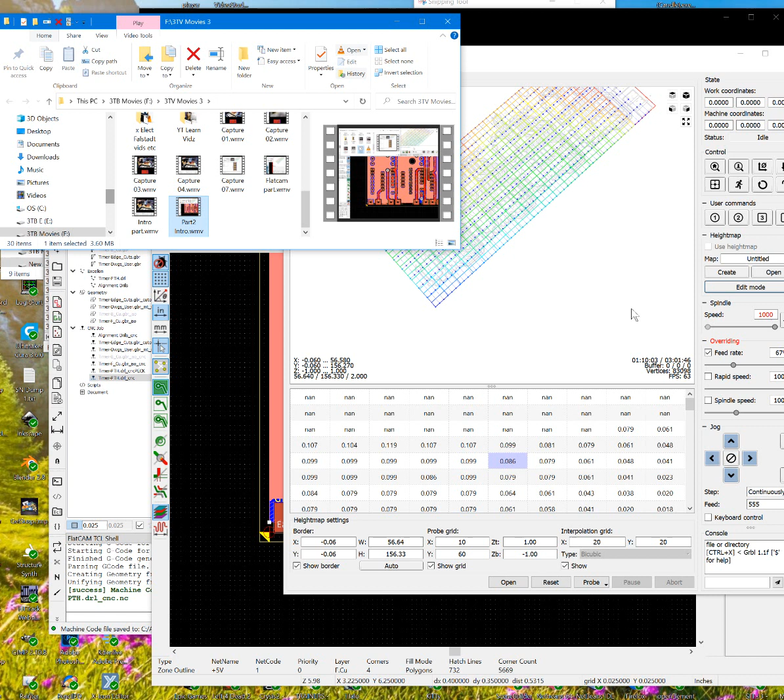Alright, I wanted to make a brief informational video about some of the software I'm using, just real quick.

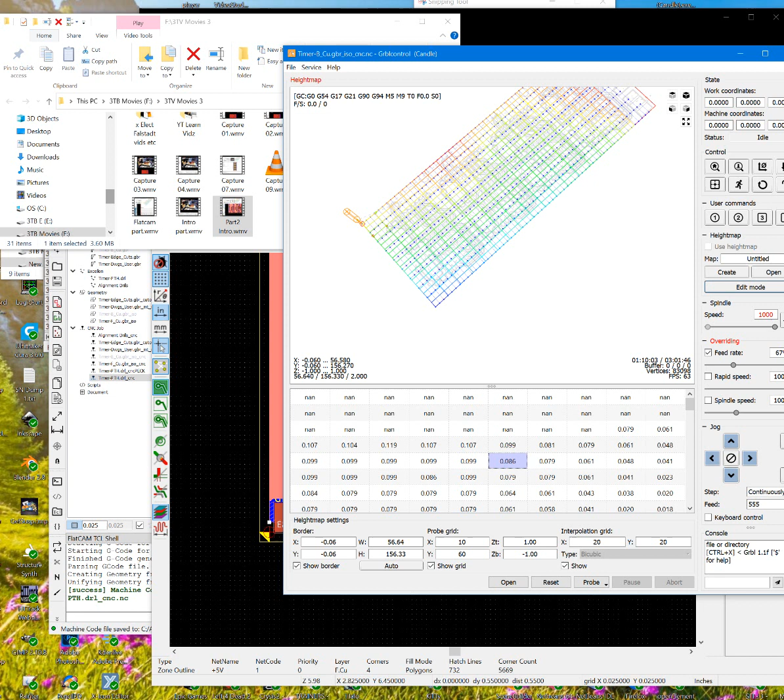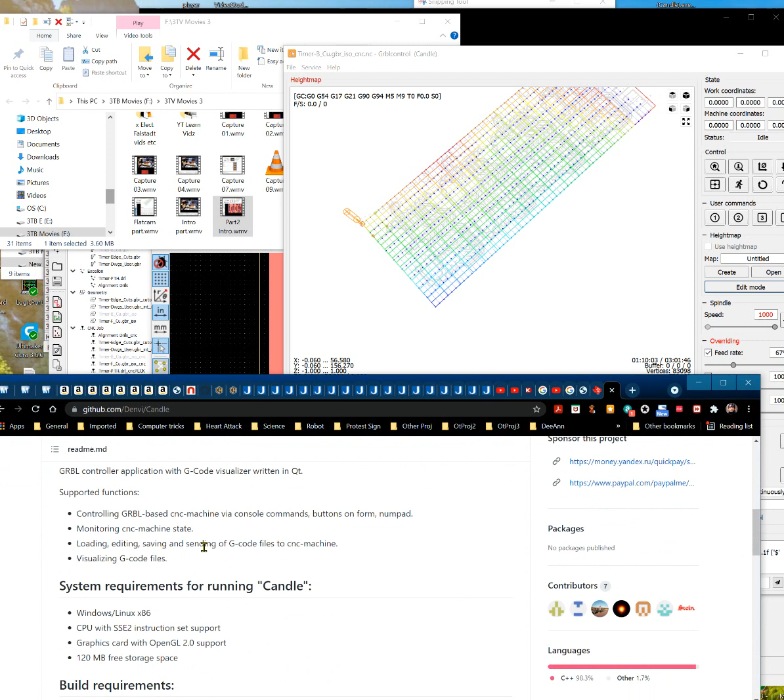This is Candle, which you can find out there—just Google Candle CNC and you'll find a GitHub site. Let me see if I can find it. Like here, I believe they have... if you're using Windows, they have a zip file with an installer on it, and that's for Candle. I don't know why they decided to name it Candle, which makes it hard to research, because you get a million hits on candle sites, especially trying to find instructions on the thing. Guys, when you're making software, name it something unique so it's easy to research. That's a hint. Names mean things. But at any rate, that's Candle for you.

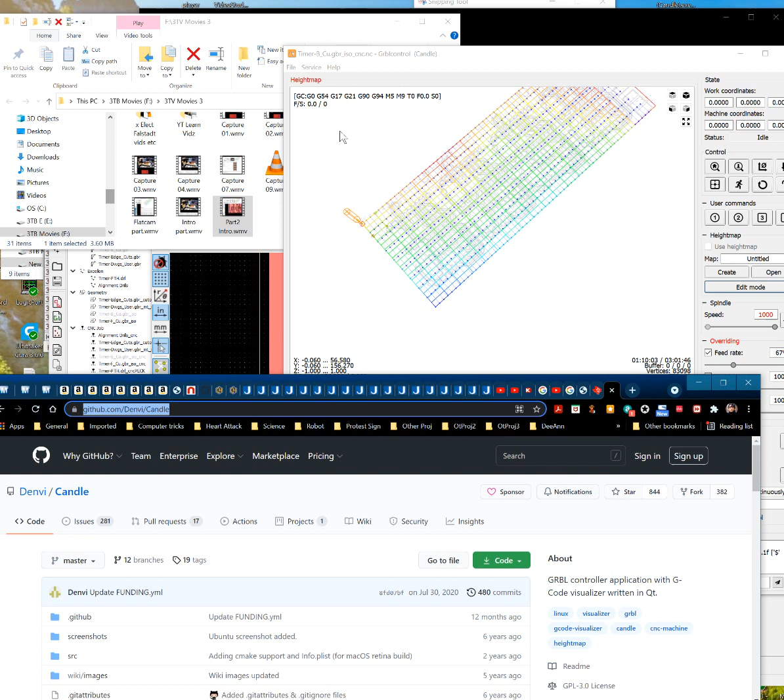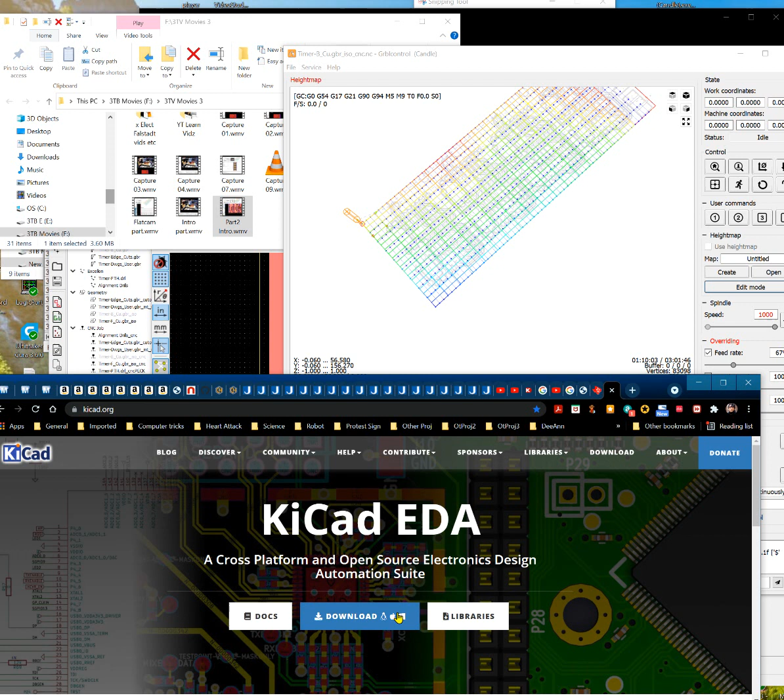And KiCad, just enter KICAD and that'll take you to KiCad.org. Again, all this is open source software, so if you want to modify it, in theory, you can, if you're into that kind of thing. But you can just go download it—again, easy to install.

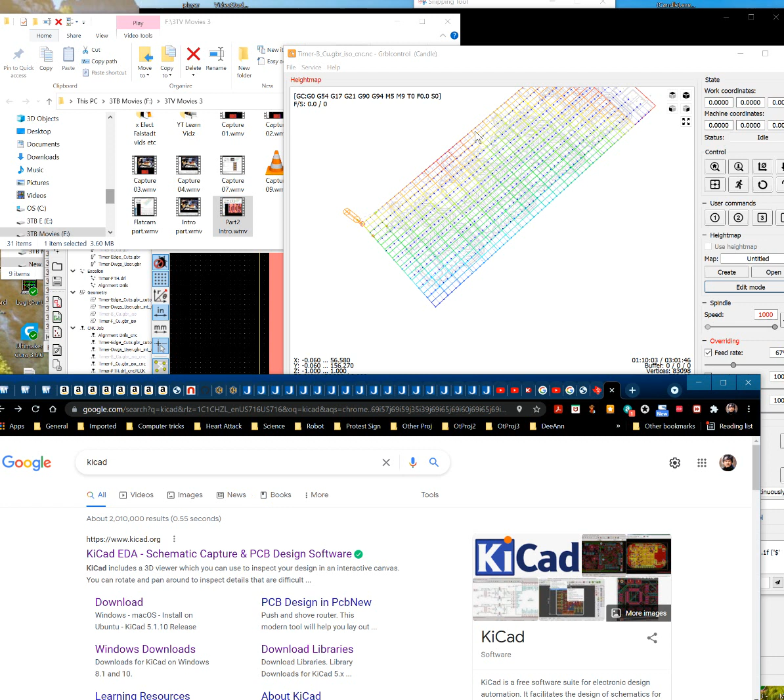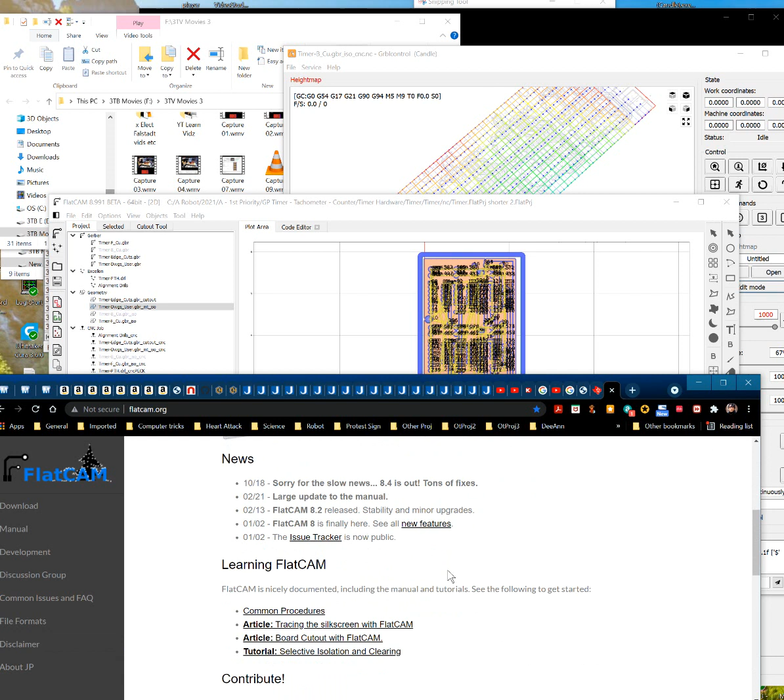Now, the one program you're going to have a real pain in the ass installing is FlatCAM. You enter FlatCAM, go to flatcam.org. They've got instructions on how to install it, but the problem is there's no real installer—these guys haven't gotten around to writing a Windows installer. You'd probably have an easier time on Linux, but you've got to install Python and some stuff like that.

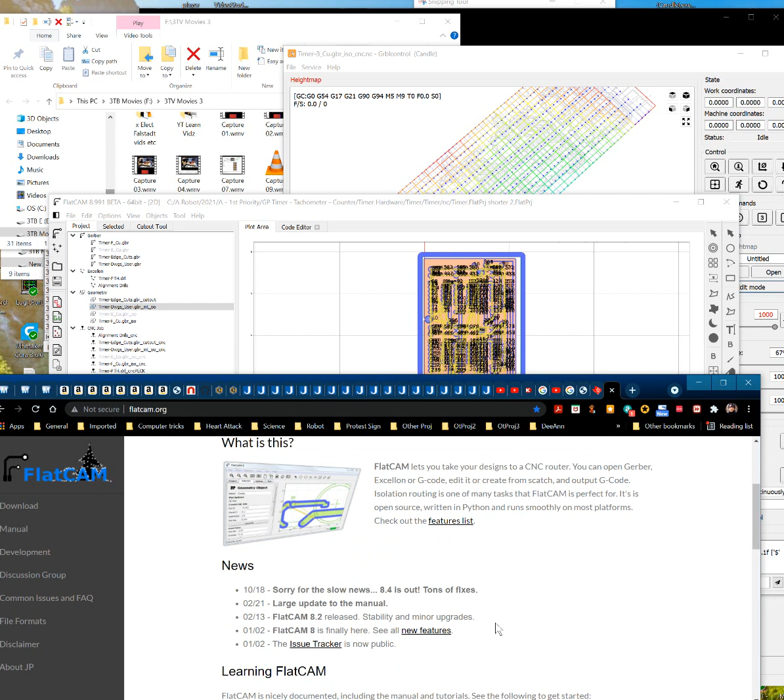It does kind of suck if you go to the download section. For Unix platforms and Windows, you download a repository from Bitbucket, and then there's a bunch of messed up instructions because there isn't really an installer—there wasn't a month ago when I looked. They do have a Windows installer ostensibly for the older version, but for Windows 32, that's for version 8.5, and I think I'm at 8.991.

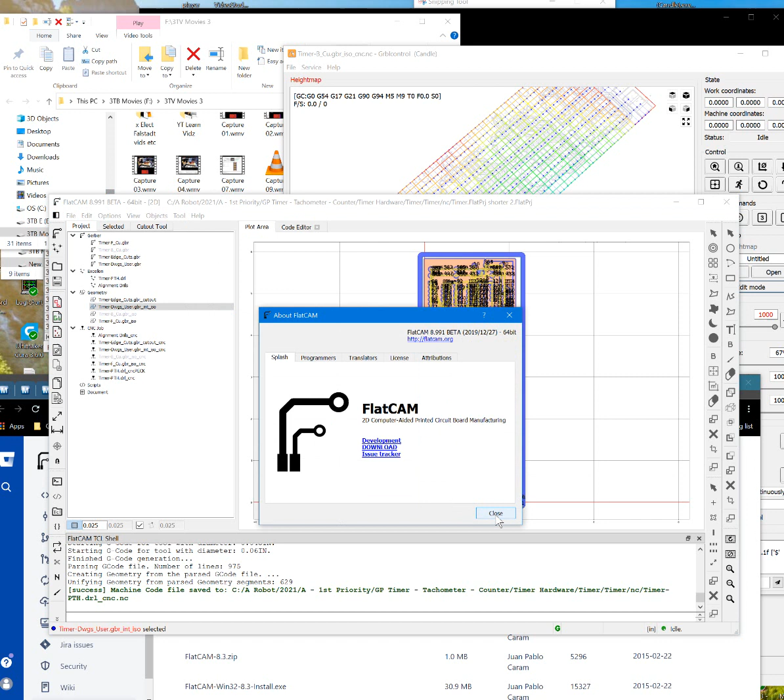Let me look at it. Yeah, 8.991 is my version. But if your operating system can support an older version, you might go through this, though that's pretty old—significantly older than the version I'm using now. As far as I know, they don't really have an installer for the newer version, like this, and I'm not using these yet.

Let's see what this says. Ah shit, it just downloaded a text file. Brilliant. Let's see what it says. Okay, I don't know what this means—high speed link, the password.

Well, maybe they have an installer. Oh, I guess somebody might have written an installer here. I guess this is trying to tell you where to go get it, and there's a password for it. So that's cool, maybe I can update it. I don't know if I want to, because at least this version works in a known way, and I don't know what new bugs they may have since these are all beta releases. But anyway, apparently they do have one, so maybe it won't be as much of a pain in the ass. My understanding is normally you have to go in and install Python and a bunch of other stuff from the command line, in your DOS window if you're on Windows.

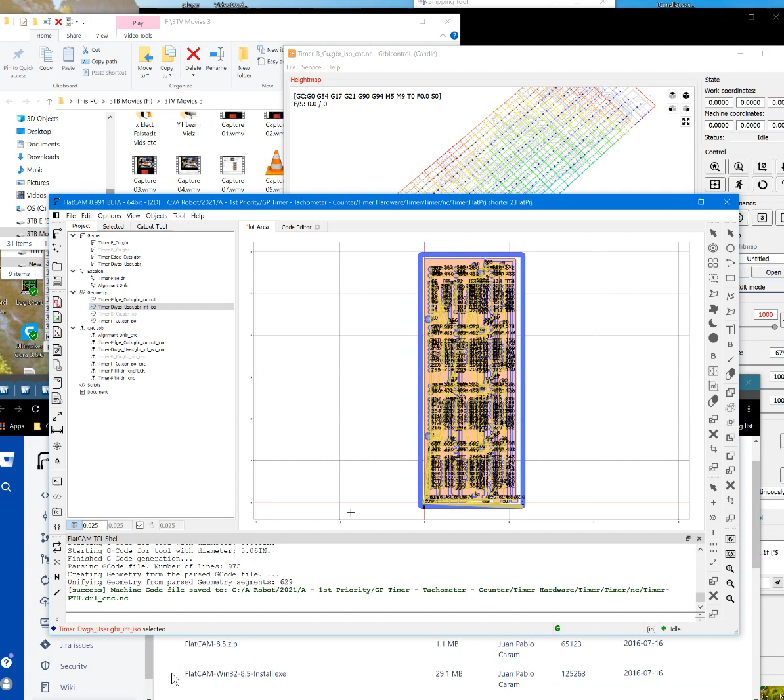The command line, that's what it is. So if you've never done things like that before, that might be a pain in the ass. This was definitely written by computer geeks for computer geeks. But maybe you'll get lucky and find an installer. I hope if I get the hankering I can do that, because it's still a bit of a pain in the butt, even though I've installed Python and everything before. I can't remember, it was about a year or so ago I installed this. But anyway, I just wanted to tell you that might be a little tricky.

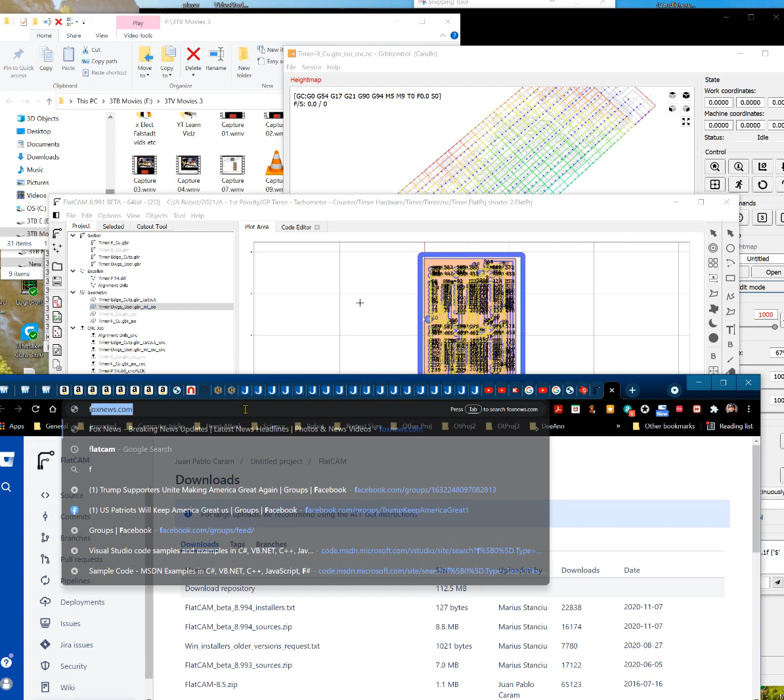But another thing you might consider, and I haven't looked into this yet, is FreeCAD. FreeCAD supposedly will handle Gerbers too instead of FlatCAM. It's a pretty neat little program, a parametric CAD program, so it's sort of like SolidWorks, but not as sophisticated. It is a good free program you can use to draw.

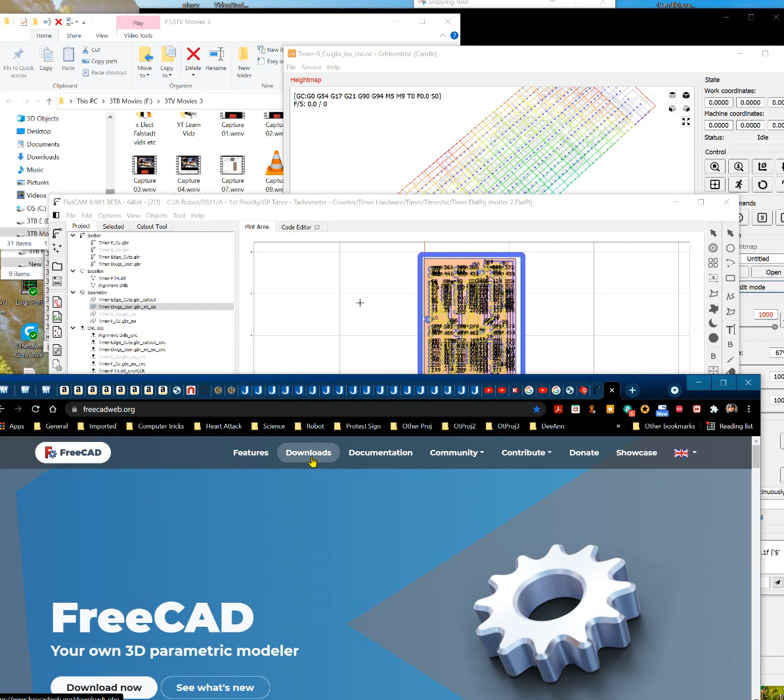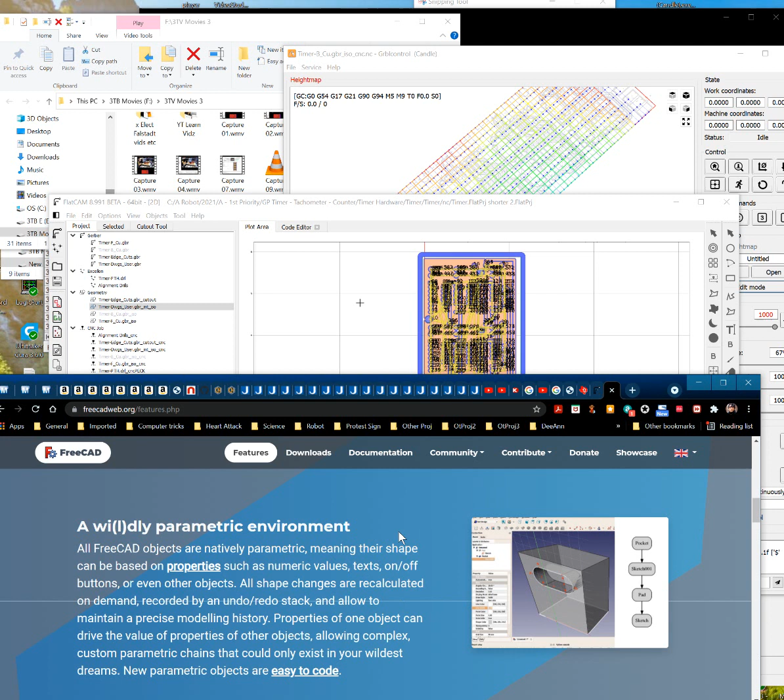Let's see if we can find any screenshots. I don't see any, but it's got an installer too, so it's easy to install. You can do all kinds of different things in it, it's a fairly sophisticated little CAD program, but again it's not like AutoCAD or anything. This is parametric, so it means you can go back and make changes to previous things you did. So it's a little easy.

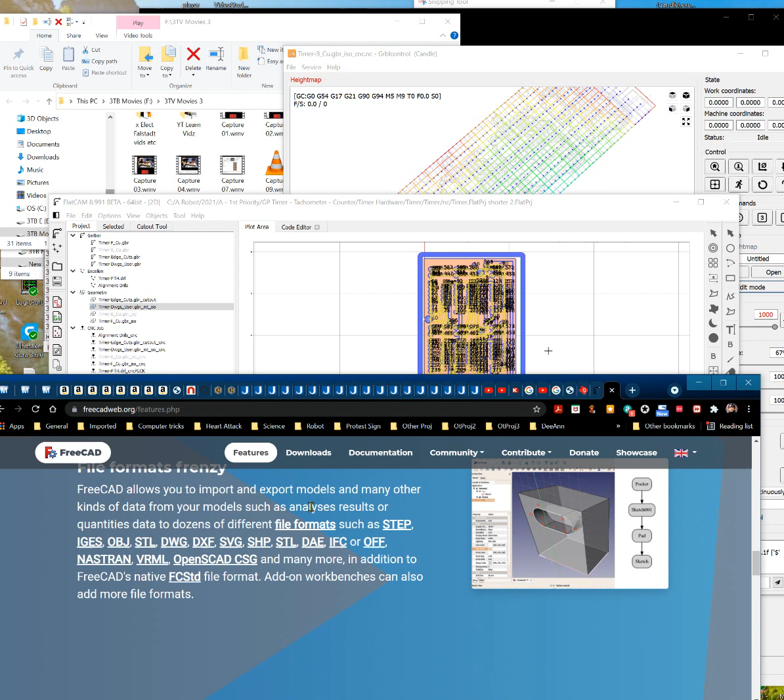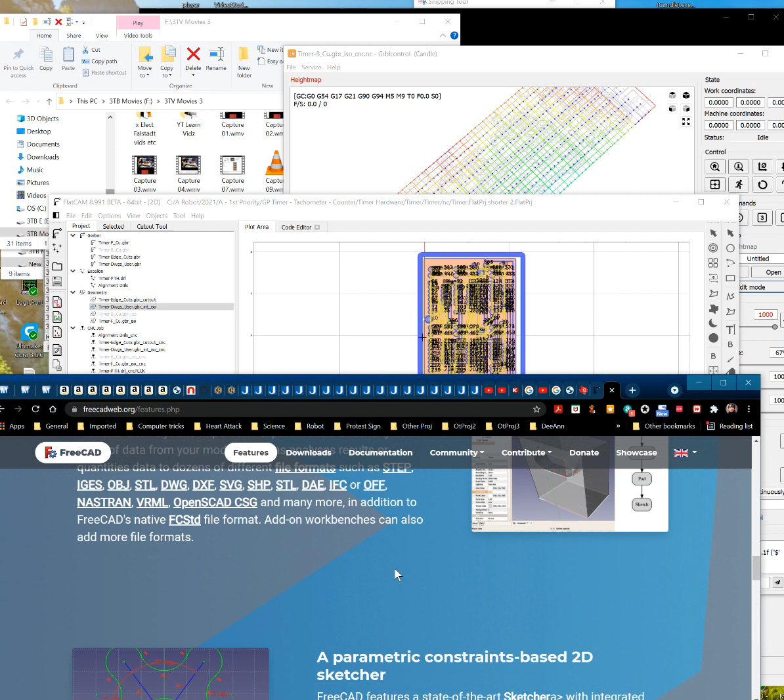But anyway, FreeCAD supposedly has the ability to take files from KiCad and generate Gerbers, not just Gerbers, but actually generate NC, CNC drill files, tooling files, G-code files directly in FreeCAD. So supposedly it'll do that. It also has some FEA modeling tools and stuff like that, so it's good for designing a bunch of different stuff. Again, it's not too difficult to learn, so there's plenty of videos on it out there.

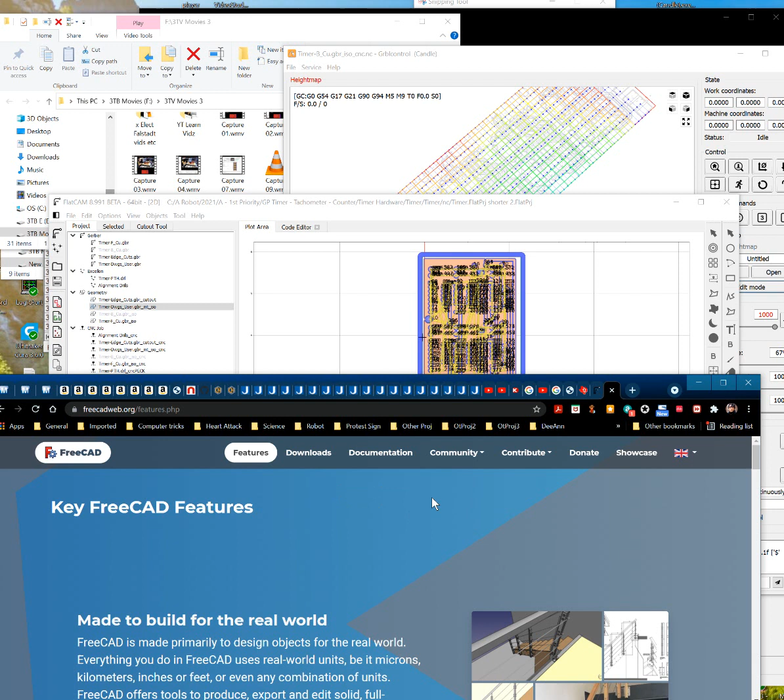So anyway, you might give it a look. I haven't checked out the CNC ability of it yet, because supposedly it can generate G-code for more than just circuit boards, but it can do that too, because they have a special little program that works in KiCad with it, so ostensibly. But again, I haven't looked into that yet. That may be an alternative to FlatCam, and you might look into it if you're having trouble getting this to work.

The first computer I installed FlatCam on, for some reason it wouldn't work, but it turned out to be because the video settings weren't working with the graphics card I had, since I just have Intel graphics on this other computer. So in the options you can go and switch it from OpenGL to native or something like that.

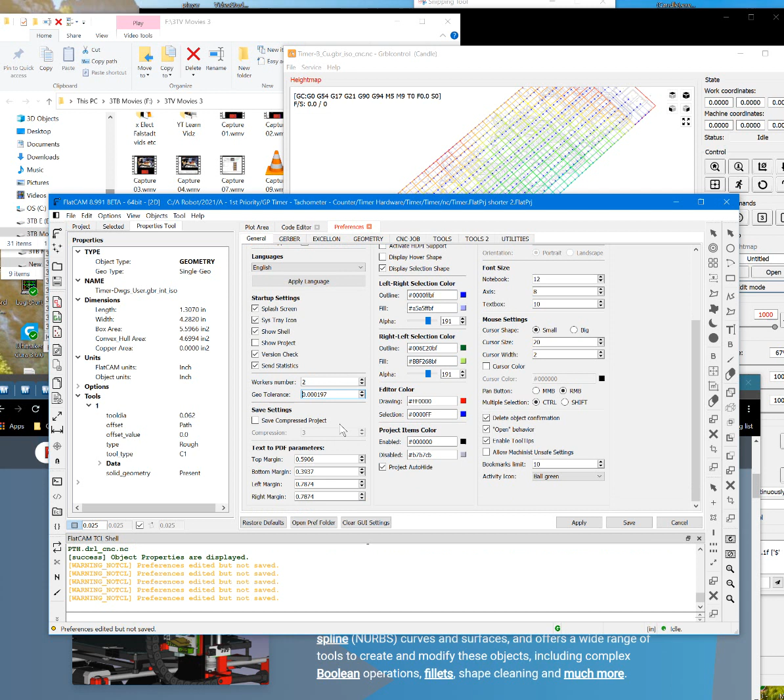Oh shit, that's not it. Supposedly in here somewhere, it's the GUI preferences. But anyway, somewhere you could switch between, yeah, right here, Legacy 2D versus OpenGL. I was having trouble with OpenGL, not just on my other computer, but on this computer too.

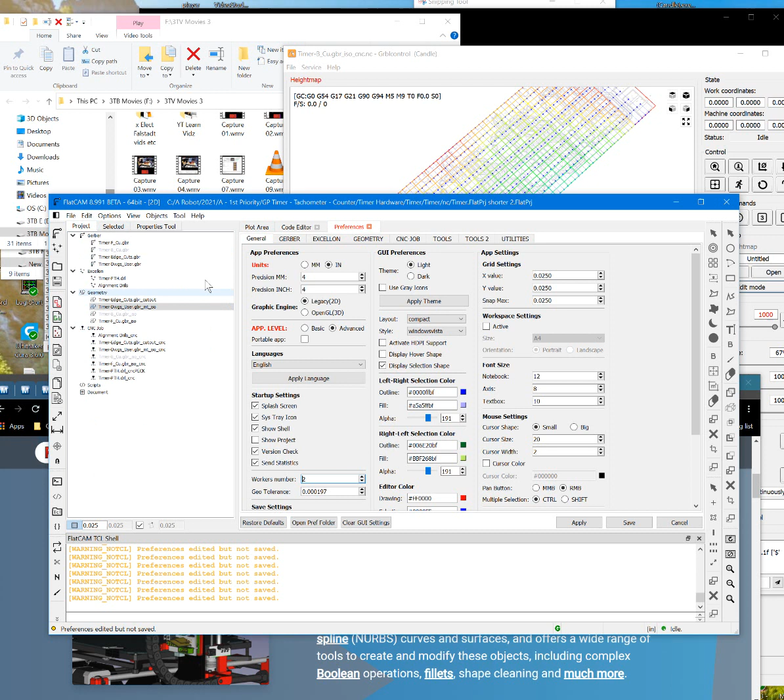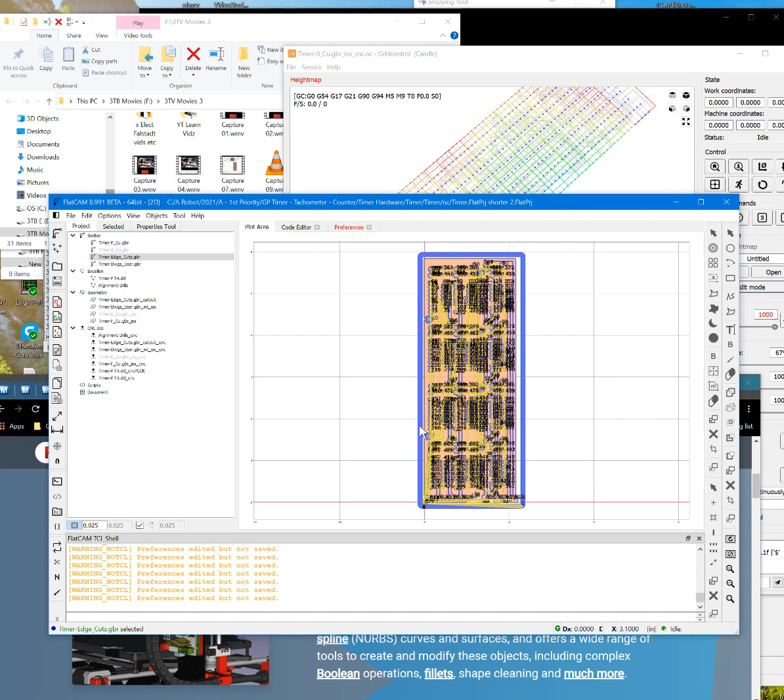Even though it generally worked, I wasn't able to edit geometry, because FlatCam is very sophisticated. I can actually go in and choose edit, for example, and it'll allow you to actually edit your geometry directly. So I can change tracks around and stuff like that. Why is this not working? But at any rate, if I put it in edit mode, I can go in and edit geometry for it and all that stuff.

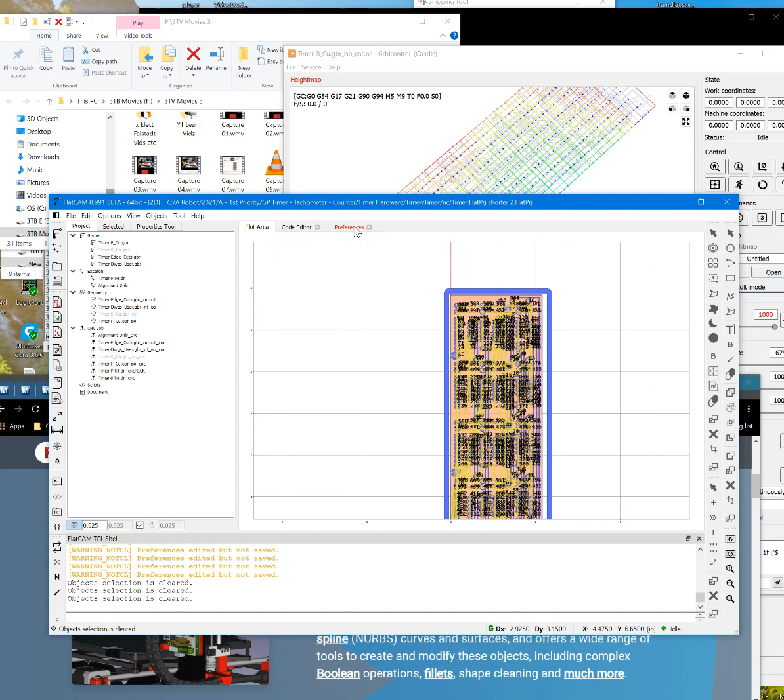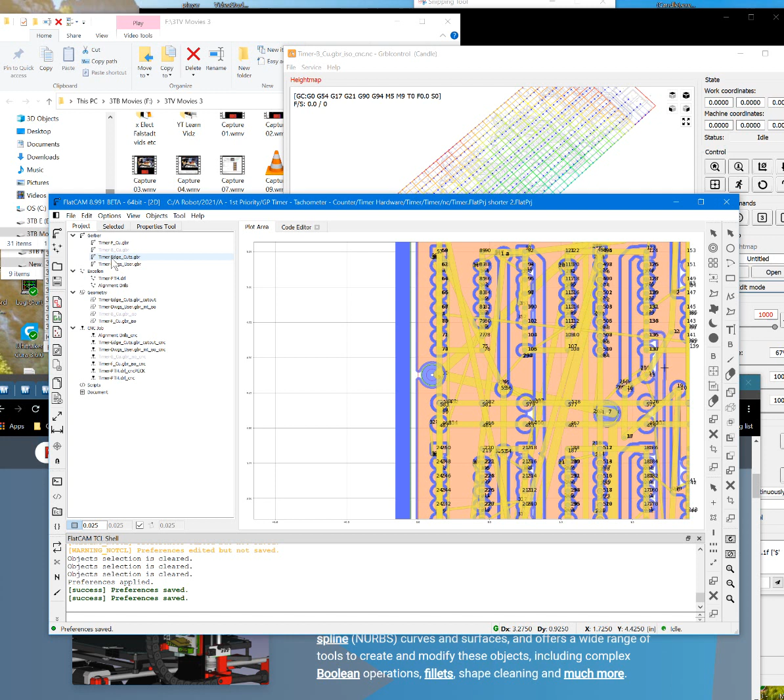Yeah, they wrote this thing in Python, for crying out loud. I didn't make any changes, I didn't want to save anything. But anyway, you can actually go edit tracks, or you can even build Gerbers from scratch in here if you want to, using all these graphic tools over here. Normally they kind of lock these things together as separate objects, but when you go in edit mode, it allows you to edit the parts that make up these objects.

So anyway, just wanted to mention that a little bit about the software options.